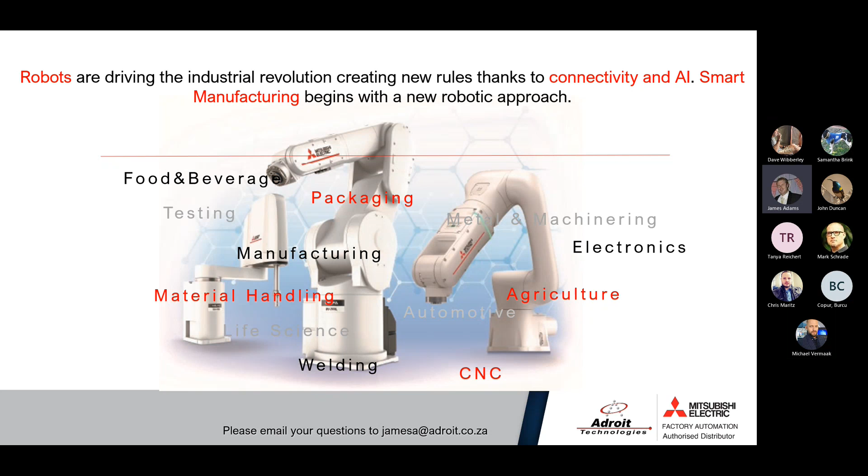So robots have been around for quite a while, since probably the early 80s. And there is a massive push in the automation industry to automate and simplify applications as we go further down the line. The latest and greatest we're looking at is using AI and machine learning based technologies to create a more advanced and a more sophisticated robot. Our robots, you will find them in all sorts of industries, from food and beverage to packaging, all the way through to agriculture and manufacturing as well. So we have an application solution for essentially any application that you would require. And we'll touch on a couple of bits and pieces as we go along.

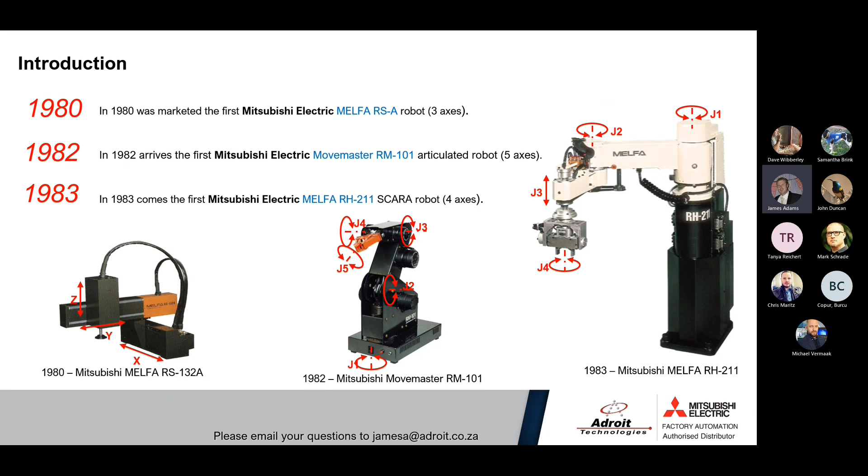So just a bit of an introduction to MELFA robots. The first robot that Mitsubishi created was in 1980. It was a 3-axis robot, a very simple type of design. There might even be one or two of them still working today. They're extremely robust, extremely capable. And in 1982, the first articulated 5-axis robot made its appearance to the world. And then further on, the first SCARA robot, which is more for your high-speed pick-and-place, 4-axis, high accuracy, came around in 1983. Since then, there has been an absolutely massive array of upgrades and new robots, all the way through to where we are today with our latest RV4 robots and our RH robots for our SCARA. So I'll explain a little bit more about that.

So the types of robots we work with are SCARA robots, as I said, for your high-speed pick-and-place applications. We have fully articulated robots, which would be 6-axis, for a bit more movement and control for applications that work in all the Cartesian plane. We also have delta robots, which kind of look like spiders, or deltoid robots. And then we start moving into the safety robots, where we have more assistive and then collaborative type robots. So we'll go through some of those as well.

Our robots, on the large scale, can go all the way through to about 70 kgs of pickup load. And generally the reaches would change between 1 meter to 2 meters, depending on the type of robot. And the accuracy is very, very good: a repeatability rating of 0.02 millimeters pretty much across the range, which is highly accurate. Our robots have our MRJ4 servo motor and encoder systems inside of them. So it's a technology that Mitsubishi knows very well, and it is a very reliable and robust solution.

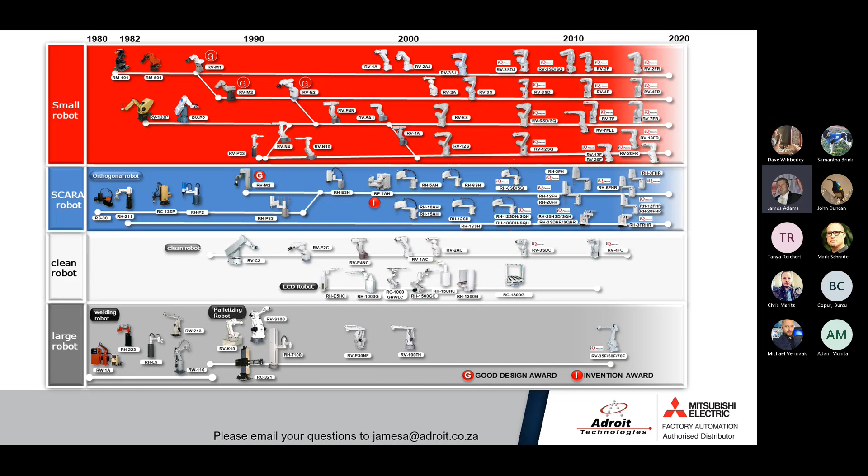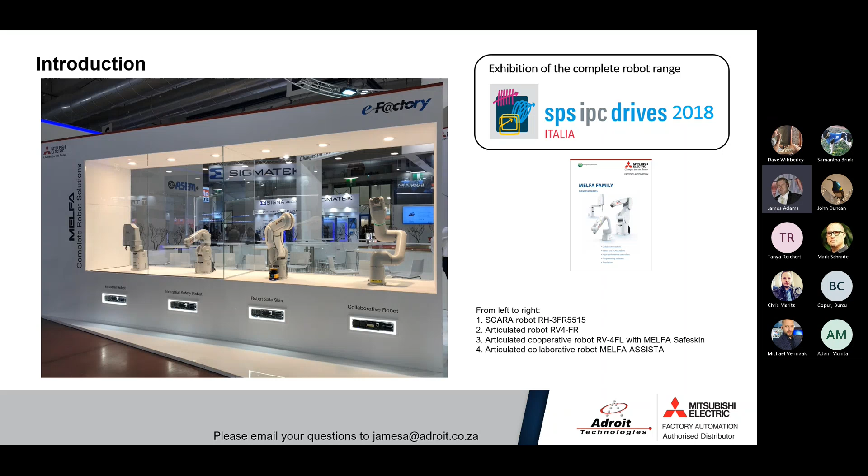So just a bit more of an intro. I've put a lot of pictures in this slideshow, but we'll have a look through it. We've got a SCARA robot on the left-hand side. This is the first robot we look at there. Then we have safety robots, or articulated robots with a skin, and then we have our collaborative robot, which we will discuss further down the line. So this is an example of some of the robot offerings we have today, and we'll discuss exactly what we use them for. So our standard robots, as I said, 1 to 70 kilograms, and we can have a reach of about 2 meters, depending on what the requirements are. Our SCARA robots can be mounted on the ceiling as well as the floor.

And they are very, very accurate and very high speed. Our articulated robots also can be mounted in the ceiling, but they are quite compact and quite small, going all the way through to the really, really big ones. And then, of course, our parallel robots, which are 4D deltas, etc., and they could be set up to work together, utilizing technology on the iQ-R PLCs that we will touch on shortly.

So cooperative robots, basically a robot with what we call a safe skin attached to them and a safety module, so that they can actually work with humans in a caged environment that will slow down and comply to certain standards. And our fully collaborative robot, which does not have to be caged if it runs at the speed that it's supposed to. We'll touch on that as well.

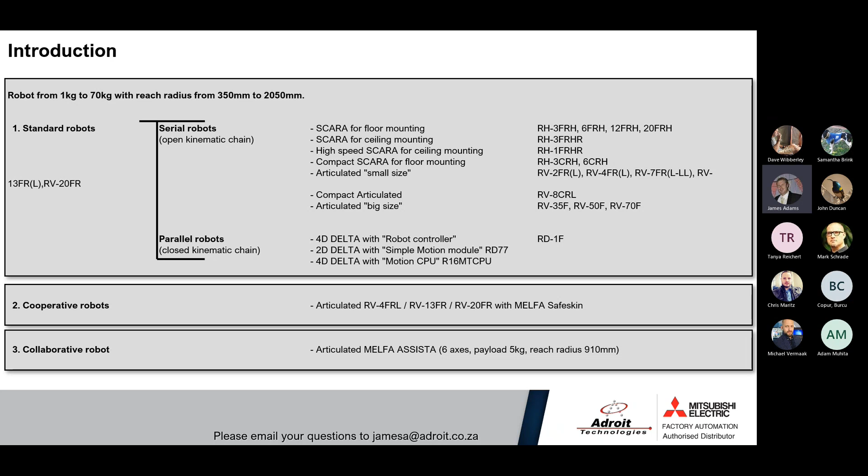So just a couple of our types of SCARA robots. These are quite popular. We've got a couple of applications that we're looking at with regards to these, mainly for pick and place. One of the solutions we're going to look at a bit later on is actually a gluing solution utilizing one of these robots. So the payloads start at 3 kgs, and we can go all the way to 20 kilograms with a reach of about a meter. They have built-in I/O and ports throughout the robot, where we could have an Ethernet cable to use any sort of I/O.

So if you've got any electric gripper or head unit that needs to be manipulated, we can do it electrically or pneumatically. The pipes are already laid out through into the robot itself, so it's very, very easy to get pneumatic grippers or anything operated pneumatically or electronically.

Just a quick little chat about the model designation. All our robots have a model designation. Obviously, RH is the horizontal robot, and we also have different types. This is mainly for the SCARA robot. We have the series, and then from there we also have a bunch of different codes for: is it H1 grease, so food grade environment? Do we have oil mist specification? So is it in a very dirty environment that might cause some problems?

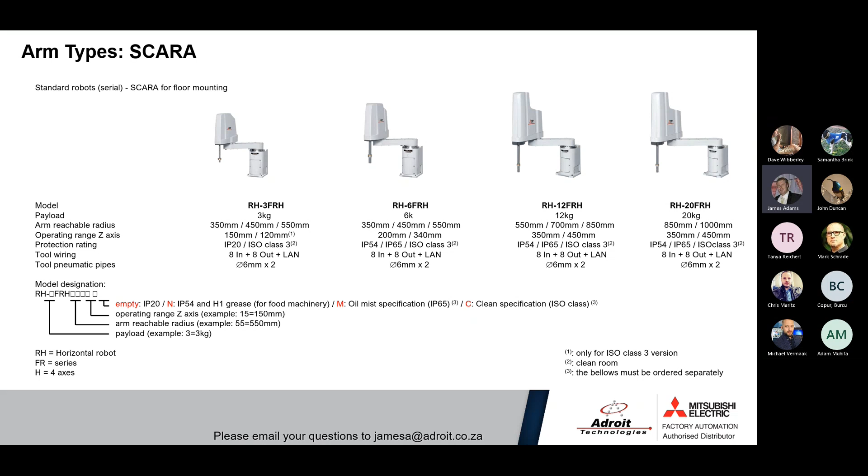And clean room specification, ISO classes as well. We also include the Z-axis in the part number, as well as the radius, and the payload rating as well. So it's a bit of a mouthful to start with, but they all do mean something.

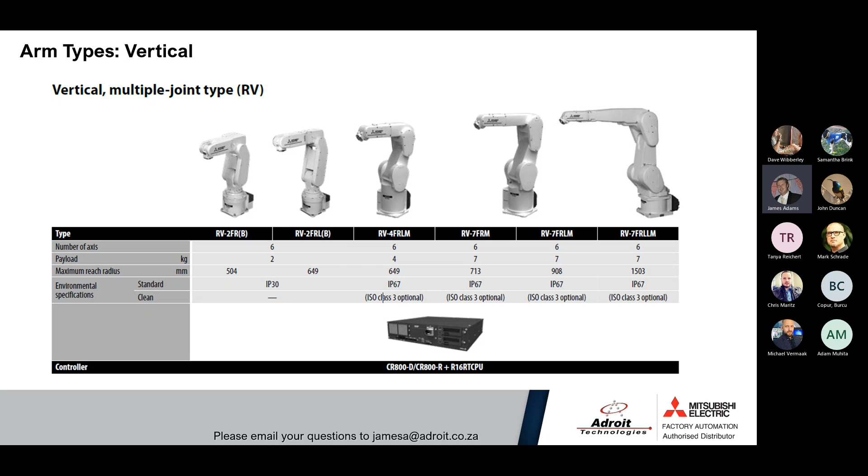All right, our vertical robots are the RV type robots, and they're 6-axis. They can carry payloads all the way up through to about 65 kg, 70 kgs, and have a reach of maximum about 2,000 millimeters or so. These robots are great. They can operate at a meter per second very efficiently, and they have their own controller as well, which we'll have a chat about now.

So we get two different types. The robot essentially is the robot by itself with its cables, and it connects to the robot controller. This is an example of the robot controllers. We have the D-type, so fully standalone. Our robots don't have to have any PLC integration, HMI, or anything else. They can basically operate on their own by programming the controller directly using a teaching pendant or using the RT ToolBox software. So there's two scenarios.

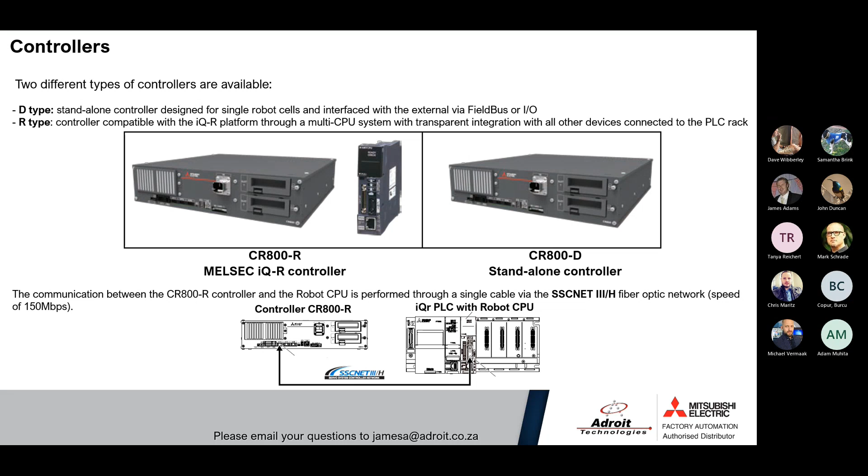So we have a standalone application, or we could have the iQ-R application, where when you're doing things like collision avoidance, which we'll touch on just now, you will have to have a robot CPU going through into the iQ-R, and you can do all your control through from there as well. We use SSCNET for the communication between the controller and the iQ-R PLC, so it's extremely fast. And nothing stops us from communicating to other protocols like DeviceNet or any other protocols that are not proprietary to Mitsubishi.

So the only differences between these controllers, really: you can actually hook up an FX5 PLC straight in through the standalone controller and do control. It's pretty cool. We've got an application where we're doing that currently. But if you really want to do collision avoidance or cooperative control, you would have to go with the robot CPU, which is the Type R controller. Essentially the same, but it comes with the robot CPU.

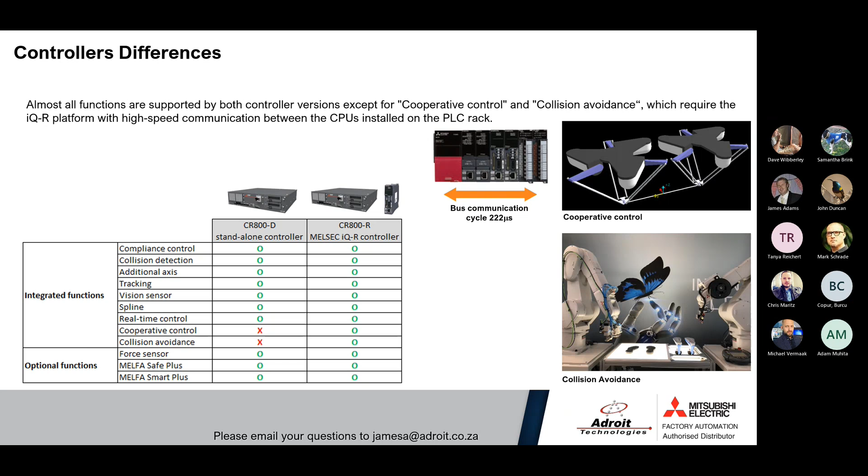Otherwise, all the functionality is built into the standard controller as well, which is quite nice. Okay, we have a couple of add-ons that we add as cards into our controllers for our robots, and there's two I want to touch on today.

There's the MELFA Safe Plus pack, where it's an extra card and an extra safety module that we attach to the robot, which then gives us a higher level of safety. So we call this level 2. The MELFA Safe Plus pack gives us the level 2. So we have additional sensors that get hooked up for SLS, SLP, STO, STR, and that creates a safer environment

for a human interaction. So when a human gets close to the robot, whether it's in the cage or opens the door of the cage, the robot will slow right down to a certain speed. So an SLS2, for instance, is 250 millimeters a second. Or if the human gets any closer, it will actually stop. So it creates an extra layer of safety with more IO and digital safety inputs and outputs as well. All right, so Safe Plus is an add-on kit that's highly recommended.

To go further on the safety side, we will then incorporate what we call a Safeskin, which will take us to the level 3 rating for safety. This is basically like a touch cover that sits on top of the robot, so it doesn't restrict its axes in any way. And if you touch it, it will stop the robot only when you touch it. So it makes it exceptionally safe.

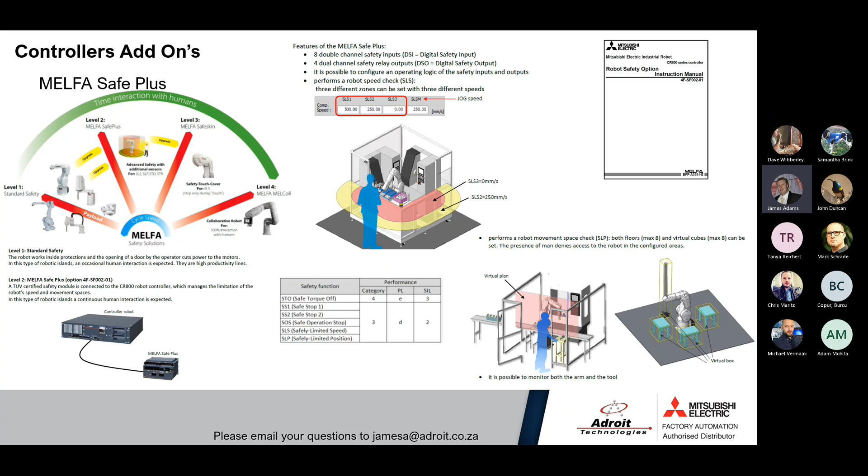Our second add-on, which is quite a cool one, is the MELFA Smart Plus system. So the Smart Plus system is nice because we have 2 functions with it. We have the intelligent function where we can monitor all of the inputs of the robot, from the torque on the servo joints all the way through to the load on the joints, as well as understanding exactly how hard this robot is working. We have the B type, which is the AI functionality using Mitsubishi's Maisart proprietary AI technology.

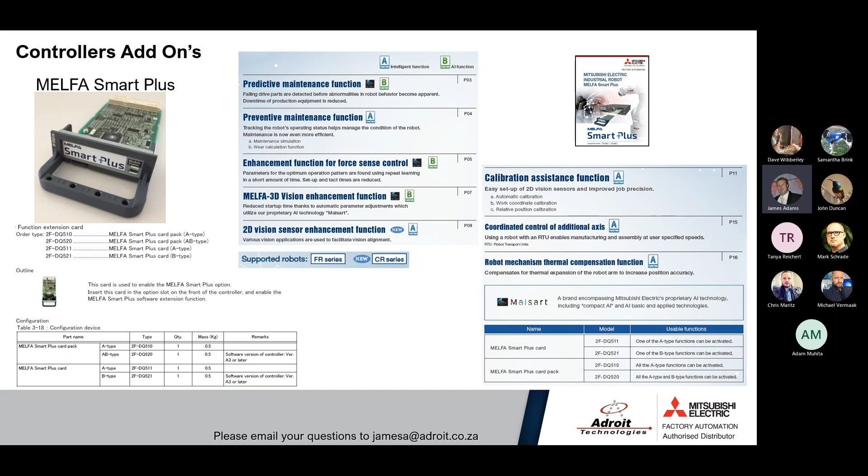And it's a compact AI, and what we do with this is we pull a whole bunch of data through this AI algorithm, and we'll be able to actually give you predictive maintenance or warnings based upon failures that could possibly happen in the near future based upon the use of the robot. So there's a lot of data that we collect to be able to anticipate a failure going forward, or what joint or what belt will need replacing, whether it's premature or on its maintenance schedule as well. So yes, the Smart Plus focus on predictive maintenance is very cool.

So essentially, as we can see, we've got some images here where we're actually pulling levels of vibration and also the load on the joints and on everything there. And we can tell you, okay, cool, we need to look at changing the belts, or the environment's not correct for the robot, and we'll start warning you, and then from there we'll alert you according to that. And this is all built into this card. So a lot of information there.

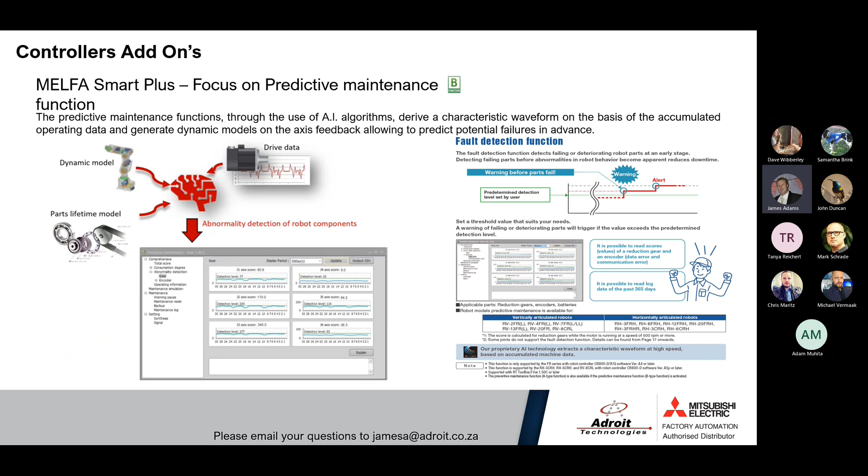For the preventative maintenance as well and the predictive, we have more than just a standard set. So the robot controller and the software, we have a standard set of run hours. How long have the joints been running? How long has the system been on for? We take that information and then we compile it, and we say, okay, cool. Well, the life of the joint, or the life of the belt is getting to a certain level, and then from there we can raise an alarm and a warning to say, listen, we need to do this.

The Smart Plus just takes it one step further, and we start doing predictive analysis on this, and we can have a look to the future based upon the load, and also model it as well in our software. So we have a 3D modeling package that's inside of the software, and what we do there is we can actually simulate the entire load environment of the robot to give us an idea of what's going to happen to the joints.

Is this robot working too hard? What is the lifespan going to be? From there, we just add on to that using this Smart Plus system. Very cool. We can take this data out and display it on an HMI, which I'll show you shortly as well.

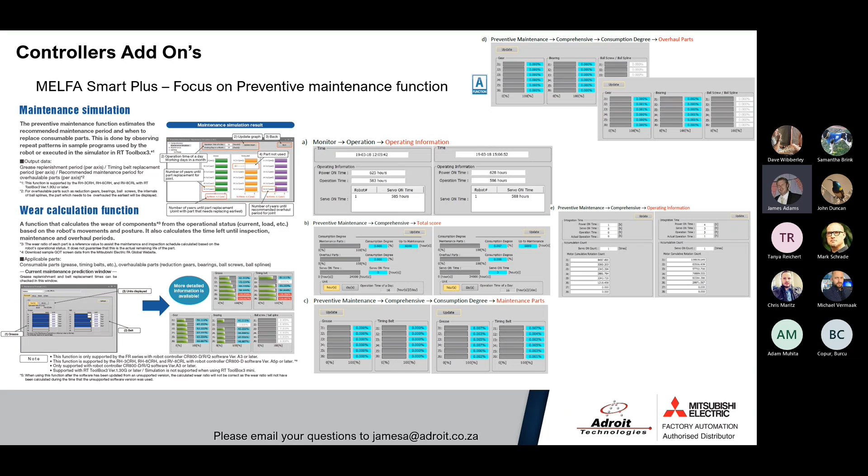Our robots have a couple of different operating modes. We have a teaching pendant, whether it be an R56TB, which is the big one with a color screen, or an R32TB, which is a small one.

These teaching pendants allow us to program the robot in a safe way without it being in a cage. We have a dead man switch basically on these that you have to hold in, and you'll be able to jog the robot via joint positions, or via coordinates on a Cartesian plane.

So by doing this, you could essentially program your robot. You have your robot set up, you have a pick and place application that you want to do. You can position and move the robot to exactly where it needs to be, and then mark that as the set of coordinates or joint positions you want to use in your program. You can also do basic programming with the teaching pendant as well.

The teaching pendant is also fantastic because we can pull all the error codes. We can see exactly what the life of the joints are, what's going on. So it's quite a handy tool for diagnosis as well as for programming.

In automatic mode, the robot with teaching pendant has no inputs. The system runs and it'll run at the designed specified cycle time or speed, etc. When we use the teaching pendant, we switch it to manual mode. It then shuts the speed down and we're limited to about 250 millimeters a second, and we can go even lower than that, just for safety.

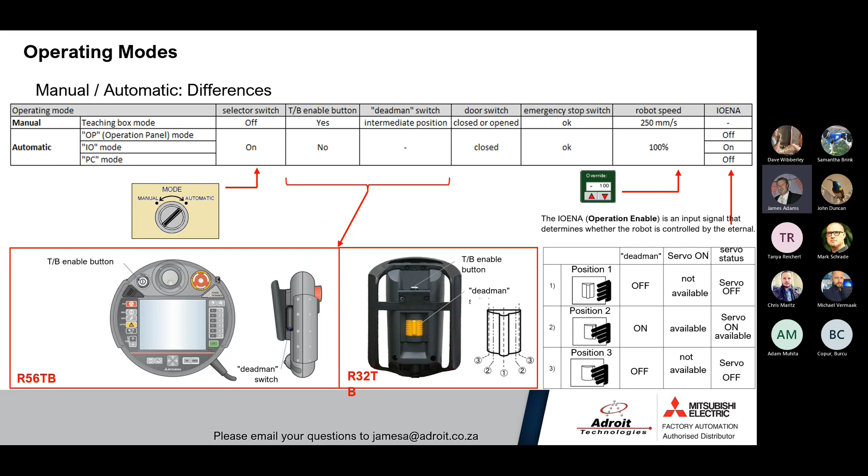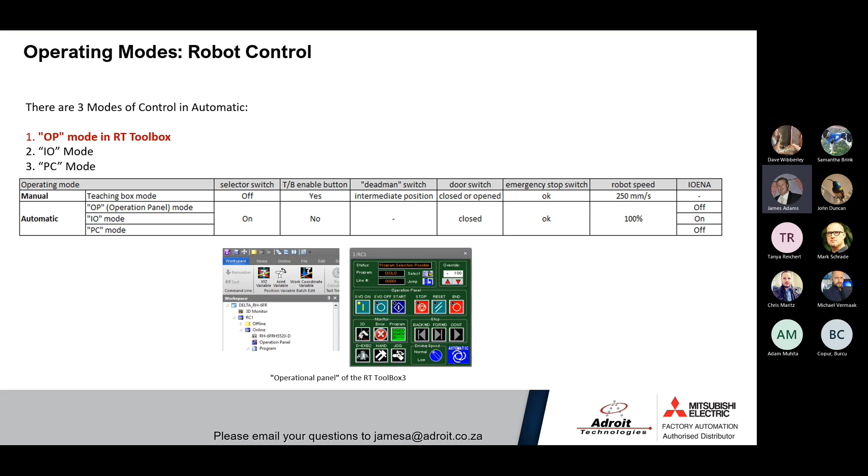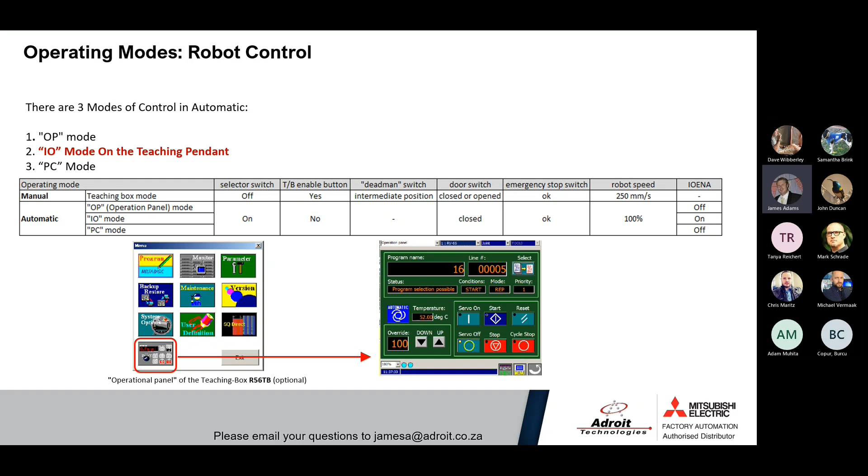We have IO mode on the teaching pendant as well, which looks exactly the same. This is one way we can control the robot in automatic mode via the teaching pendant. The last one we have is via Microsoft's ActiveX, so you can actually build a little environment using Visual Basic or C++, where you can control the robot if you really wanted to go down that road.

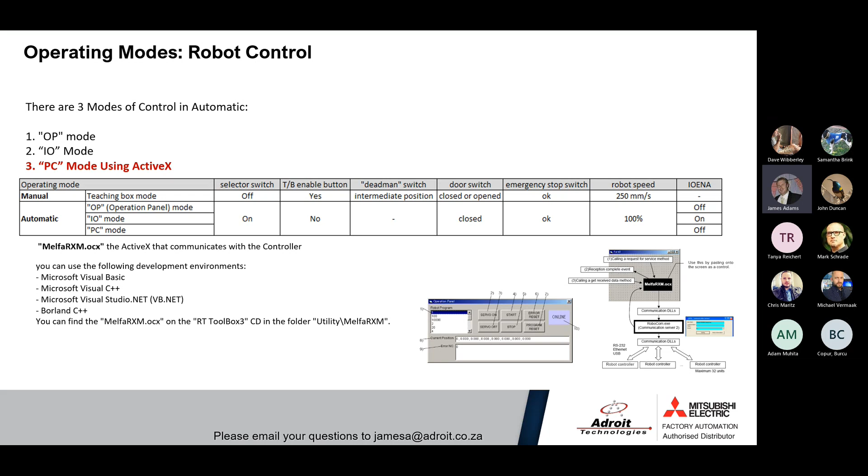It's nice to have extra ways to control this robot, but the most common way is we'll use a teaching pendant to teach the points we want, then write a program inside RT Toolbox. We use a language called MELFA Basic, which isn't very difficult to use. It's almost like structured text, where we can tell the robot what to do based on coordinates, and you can define certain points as what they are in your program.

From there, we have a nice set of mimics for your HMIs as well, that you literally just drop down and then connect your GOT 2000 directly to the robot controller. All the information on the robot is then displayed on your HMI. All these things have been set up, the dressing's already been done. It's a very simple thing, we just tell it what robot we're talking about and off we go.

I'd also like to mention that the documentation for Mitsubishi robots is absolutely exceptional. There's a huge array of information on the right-hand side of my screen here, you can see a couple of examples of this. There are documents for absolutely everything on the robot. Yes, they are sophisticated, but the documentation also guides you through the whole process, and you'll be able to find solutions throughout all the manuals for all the different types of integrations you want to do. There's also the maintenance manual, which is also very thorough, and we'll touch on that shortly as well.

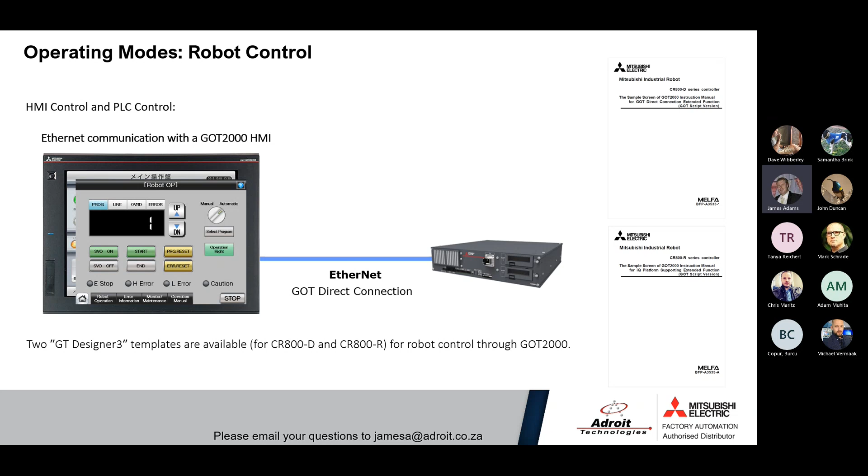Maintenance, okay. Right, so robots are like cars. They will go and go, but if you don't maintain them, they won't go anymore. If you don't change your oil in your car for a couple of years, you're going to get problems further down the line.

But if you maintain it well, you're going to get a long life out of it. Our robots have a great lifespan - you're looking at about 10 to 15 years of service if you maintain them properly. They're really good, and they're designed specifically for the application. You don't over-rev them, they'll be okay.

But this is all part of the solution building. We'll look at that before we even deploy a robot, to make sure that we're not going over the limits of the robot's joints and weights.

So on the right-hand side, I've given a little snapshot from the manual. Our robots require quite a lot of maintenance, but not in a crazy sense - I'll explain why. We do a daily inspection generally, a visual inspection to make sure everything's fine, fire it up, off we go. Then we have monthly inspections, 6-month inspections, 2-year inspections, battery replacements, and lubrication.

So for every X amount of hours that the robot runs, we log all that. We'll say, listen, we need some maintenance, and we go and do exactly what's set out in the manual. Fairly simple - of course, not one size fits all.

Robots that are running 24 hours a day, working pretty hard, are going to need maintenance way more often. So we have a little calculation we can put together to give you an approximate idea of when your maintenance is required. For instance, if you're running 2 shifts at 15 hours a day, 20 days a month, 12 months a year, then every 3,600 hours we're going to need to do some maintenance. Obviously, if it's working less, then less maintenance is needed.

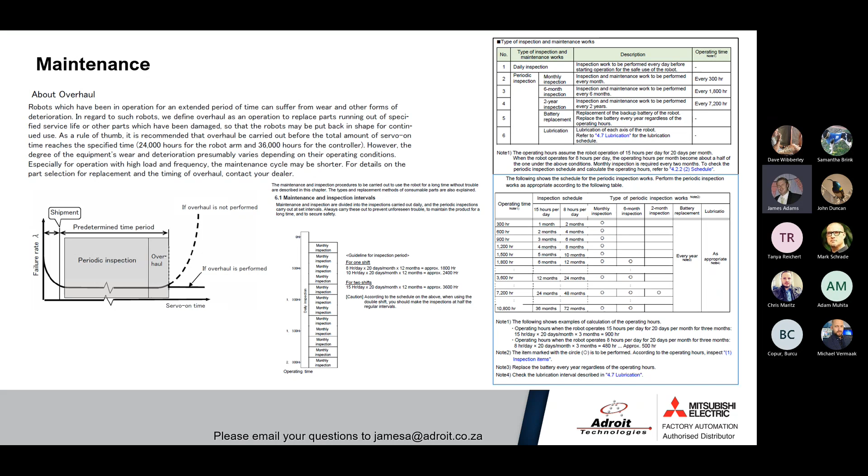The main parts of maintenance on the robot is the BBG - belts, batteries, and grease. Belts need to be replaced about every 35,000 hours of operation, but this also depends on load. We have documentation showing exactly how to inspect them and what to look for.

Batteries, once a year. This is important, as our batteries basically hold the absolute positions for the encoders and servos inside the robot. So what will happen is we'll send an alarm saying the batteries are low, or that we need to replace the batteries.

If the batteries go flat and the robot loses power, we lose the absolute encoder position. The problem is the robot doesn't know where it's oriented and what it needs to be. So in the cover of the robot, we have the absolute positions that can be reprogrammed back into the robot, and off we go. Failing that, we'd have to jig the robot and get it to its absolute position.

There are some little lines on some robots that we can line up to, but these need to be very, very accurate pieces of equipment, so we don't really want to get to the stage where we lose batteries. It's exceptionally important that we recommend once-a-year battery changes, or as soon as that alarm comes on, follow the battery replacement process.

Greasing every 6,000 hours. These manuals are so intense that I was reading the other day about a greasing procedure for certain ball screws on some of the robots where we have to measure out 1 gram of grease. There's a special grease we have to use, and we need a little scale to measure it out as exactly 1 gram, and that's all we put into the joint. It's quite a fine-tuned Japanese piece of kit. It really requires attention, but that's how we get the accuracy and reliability out of these.

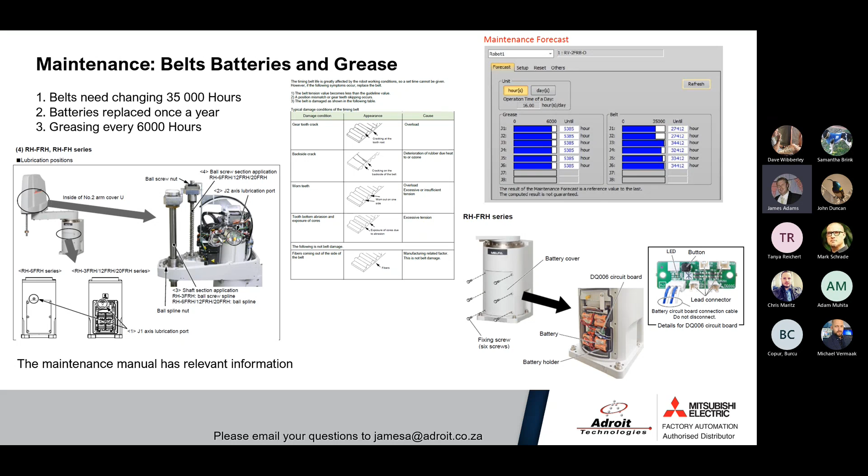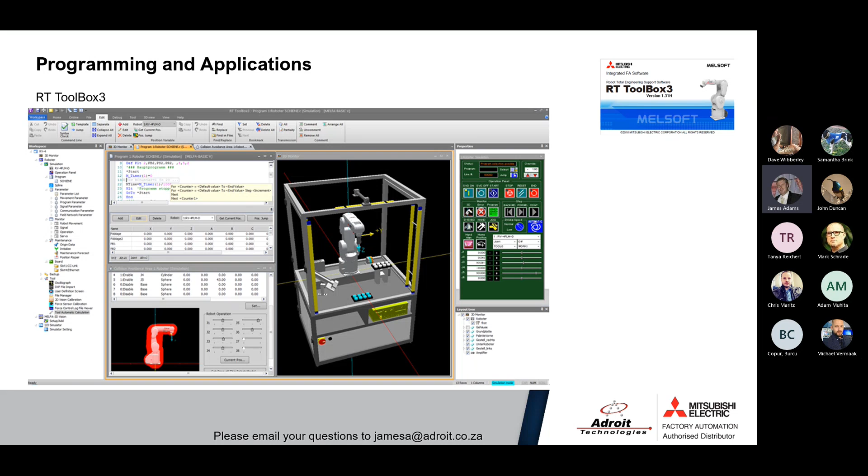While we're doing this, we can also simulate the load I mentioned before, and we can actually look at how well this robot is going to perform over its life. Once you're happy with your simulation, you stick it straight on your robot and download it, and off you go. It's as easy as that, really.

This is exactly what our software looks like. Some of the applications - I've got this little pick and place example of a program. On the right-hand side, you can see this is the program we would write in MELFA Basic to make this happen. It's a little bit technical, but we can look at these kinds of solutions going forward.

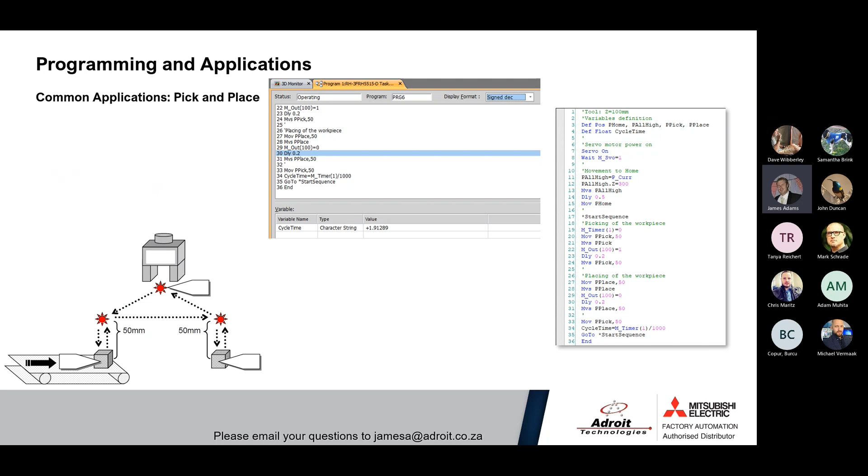We also offer to go through simulations and have them checked by Mitsubishi Electric, who can give us some guidance on maybe a better way to do something. There are a lot of very clever functions built into these robots, like palletizing, for instance. It's built in - we just have to add the palletizing into your code, and it knows what to do. It's very clever in that sense, and there are many different applications already predefined that we can sit and fiddle with.

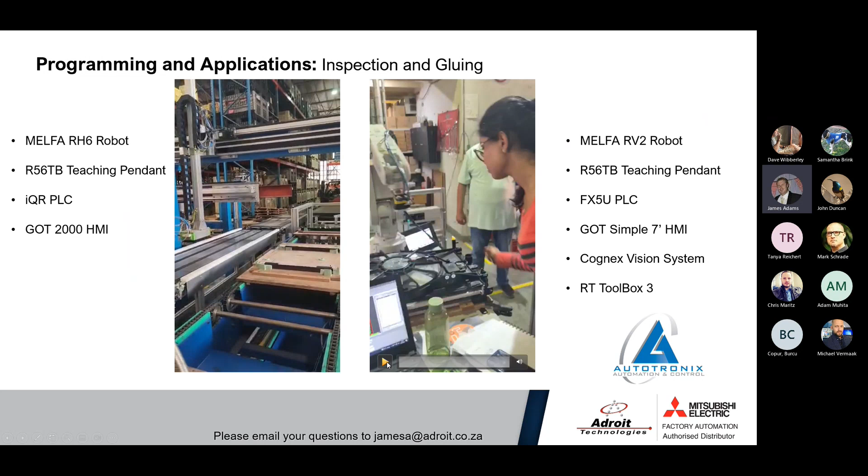Then we're looking at an inspection application as well. This is our demo robot, RV2. She or he needs a name - I'm still getting there to name this one - but this is the robot we use on our stand and for demo purposes as well.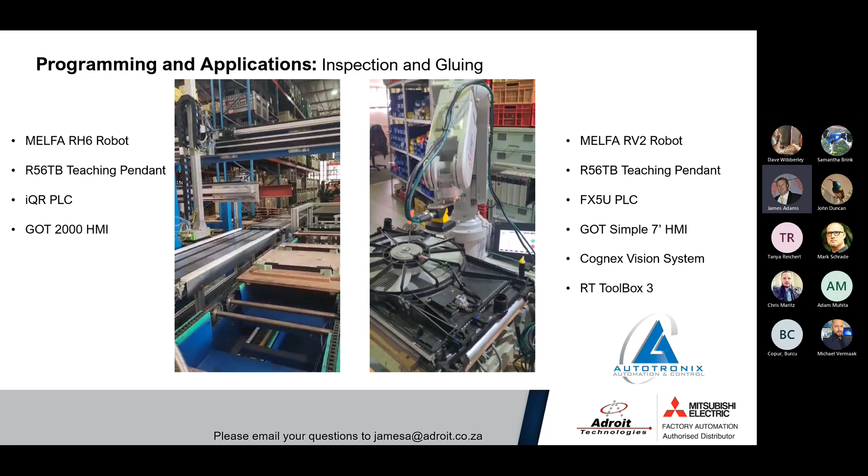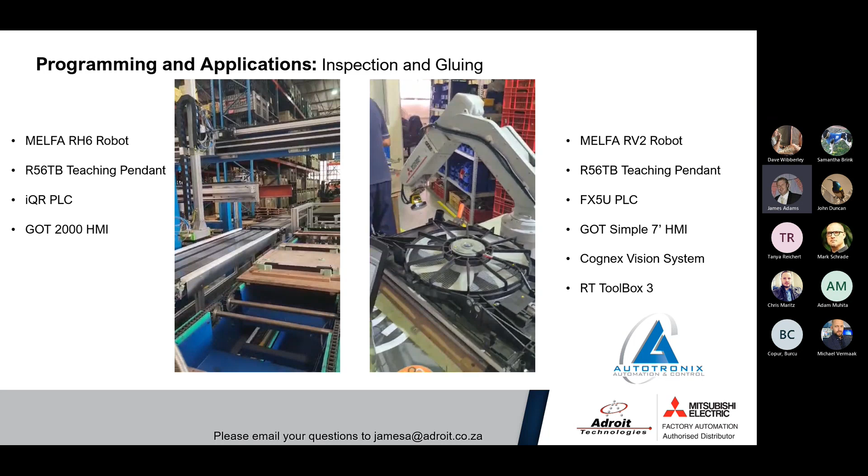What we've got here is a Cognex vision system sitting on the end of the robot. We're taking pictures of certain areas around this radiator grill and comparing them to a set of preset images that say yes, this is fine, or no, this is not fine. All this robot is doing is taking photos around the area and giving us a pass-fail. If we pass, we move on; if we fail, we go back. We've got this hooked up to an FX5 PLC, so it's a standalone controller - there's no IQR robot CPU for the IQR.

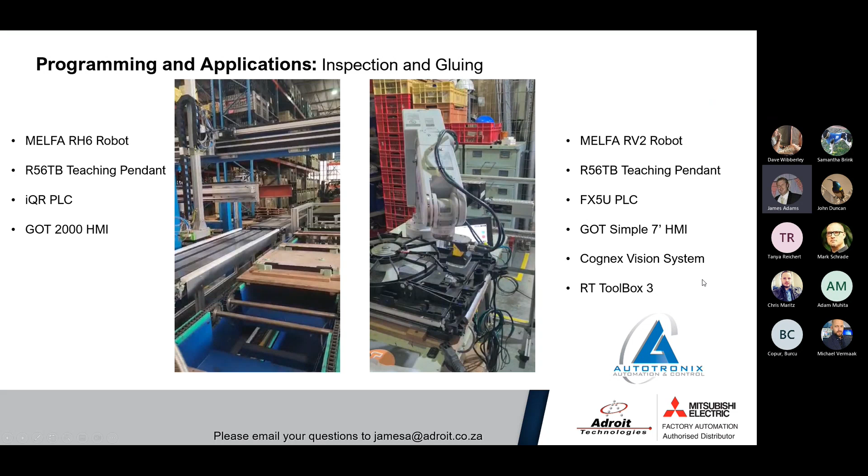We hooked it up directly to the FX5 PLC, and we're using a GOT Simple here as well, just to display information, start and stop the process, etc. So this is more proof of concept where we're looking at the moment. For this specific customer, we would be looking at a MELFA ASSISTA collaborative robot for this application. We essentially just take the program out of this one and stick it in the new one, modify it a little bit, and off we go. That's a good example of what we can use these robots for, rather than having sophisticated servo-based systems. This guy will operate like this 24 hours a day. Alright, let's go to the next one.

I'd like to talk a little bit about ASSISTA. I mentioned collaborative robots before - MELFA ASSISTA is our collaborative robot, and it's a very nice piece of kit, if I might say so myself. This robot is designed to work with humans. We've partnered with other companies like Cognex for vision systems, and a couple of gripper companies as well. We have bolt-on, off-the-shelf solutions to stick straight onto the end of the robot's head. These robots also have a skin on them, and a lighting system that changes color depending on how close you're getting or what status it's in - it's red, green, and yellow, I think.

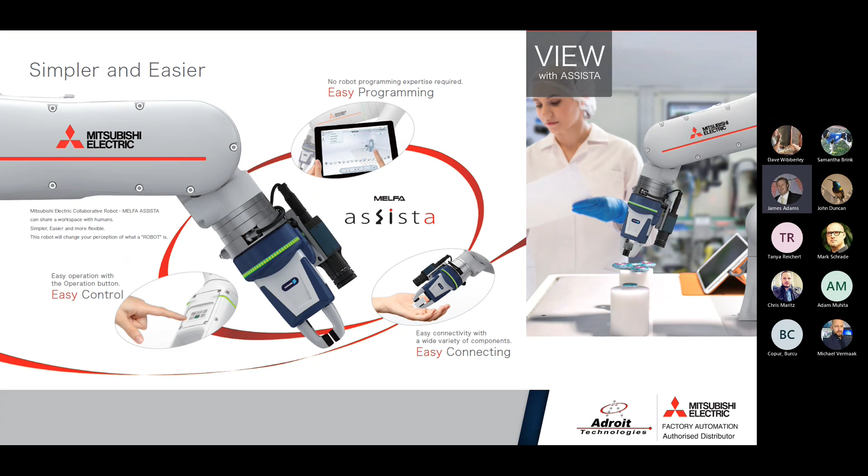These robots are also very easy to program. You wouldn't need a teaching pendant for something like this, because you could actually just move the head of the robot around to give it the points, then set the points on the control panel, or use a visual-based programming utility on a tablet. So you don't have to be a rocket scientist - you could learn how to program this thing with a bit of logic using a tablet, which makes it nice and easy and very reliable. With all the standardized, pre-programmed equipment we can stick on, especially Cognex vision systems, we don't have to do anything funny to integrate with the robot. They integrate very easily, give us the information we require, the camera does the work, and we get the data we need to carry on from there.

So this is the type of robot we'd use in an inspection system environment. There's nothing that says this robot can't be used in a full cage environment either, because it's also a full-on industrial robot like our others. You can stick it in a cage and do 1 meter per second high-speed runs, and when you open the cage - basically all the safety features you'd put on a standard industrial robot - the MELFA ASSISTA comes with a much more simplified, easier package for that.

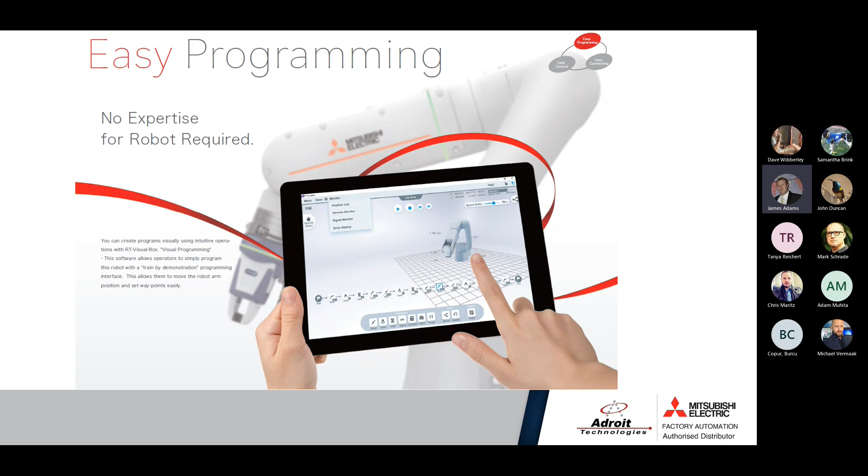This ASSISTA robot can only do about 5 kilograms maximum load rating. It's more suited for pharmaceutical-based or inspection-based applications where you're in close proximity to people, though you can also put it in a cage and go all the way. It's not as accurate as the other robots - 0.03 millimeters repeatability - but still very, very accurate, and it can operate in quite a range of environments.

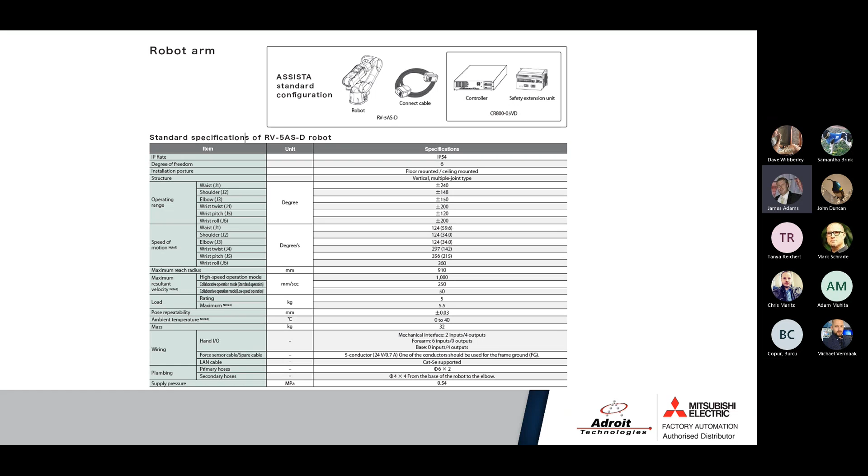So that's the ASSISTA, and we're hoping to get one or two of those up and running in South Africa very soon. There are many applications we're looking at, and a robot can really help solve all your needs. The initial investment is really worth it in the long run - robots can work 24 hours a day, and if maintained correctly, are very, very reliable.